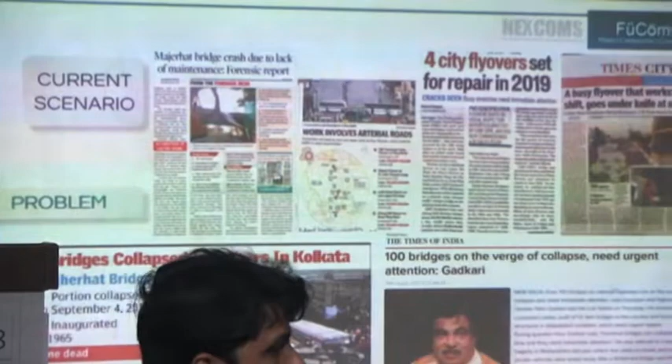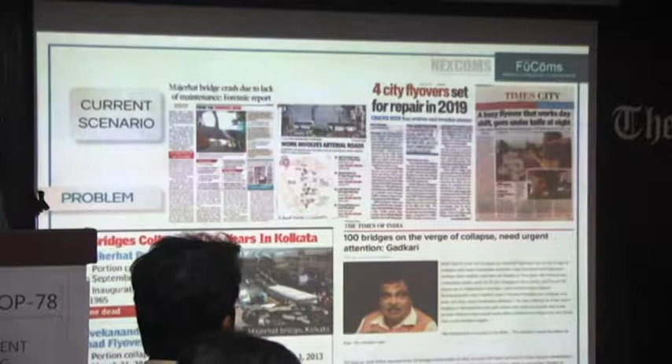We see the current scenario in India, the need to reinforce and bring back life to structural bridges, and current events of India. Next page, please. We've seen enough pictures, so I don't have to elaborate on this. These are current scenarios.

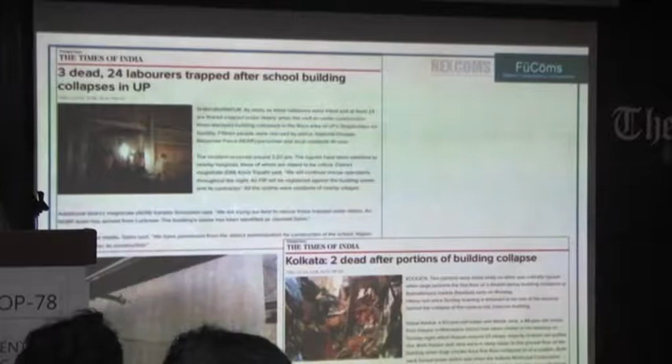Do you wish we could have saved these bridges and buildings and people? Of course, the answer is yes. Would it be nice if the occupants had time to escape, reducing all the casualties or the catastrophic results? Yes.

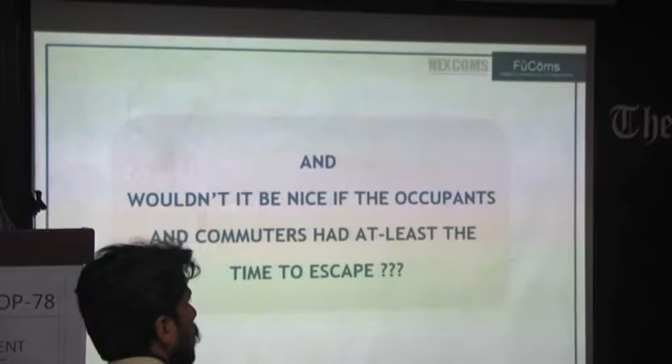What if the strengthening of a building or bridge structure is merely a matter of days instead of months or years? What if we already had that technology here, and we could apply it in India? What if the conventional rehabilitation method that took almost 12 months to strengthen bridges and buildings is replaced by a method which can be done in less than 30 days?

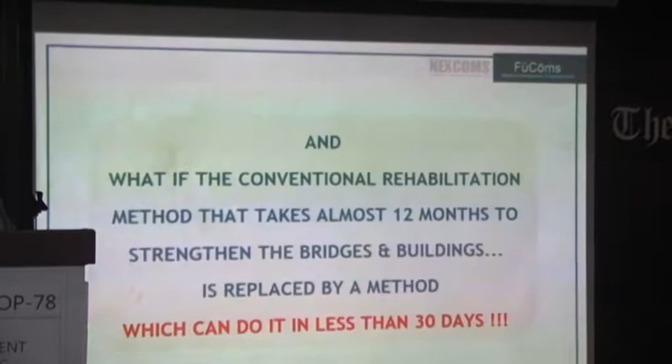We'll have a short film here. This depicts the overview of our product.

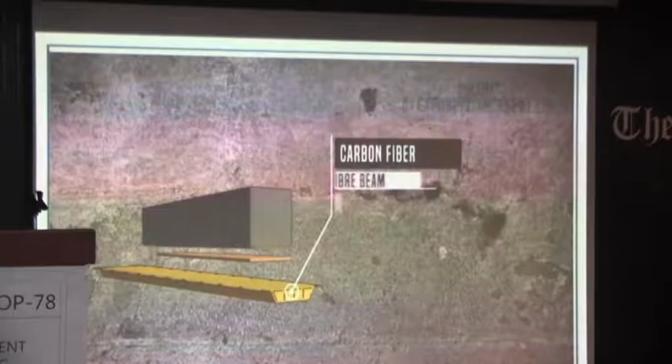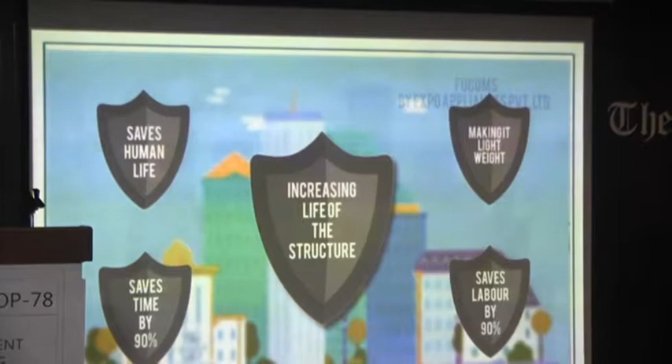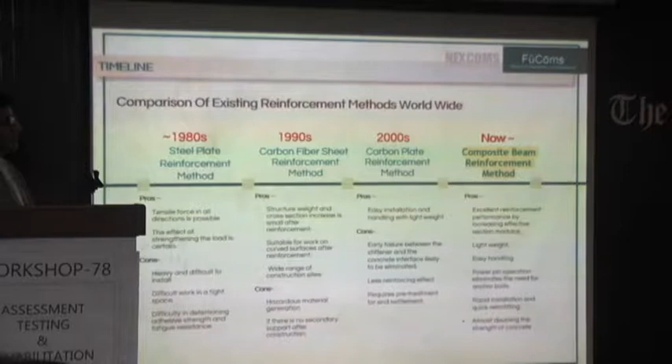Basically we use carbon fiber as well as glass fiber in the reinforcement. The background of this technology evolving is that in the 80s in South Korea, there was a major catastrophe of a bridge connecting the Seoul metropolitan city, connecting two shores, and it collapsed. It was a huge disaster in Korea. Then the government body saw the need to strengthen the public law for these weak bridges. So this constant audit and public law has developed since the 80s in Korea.

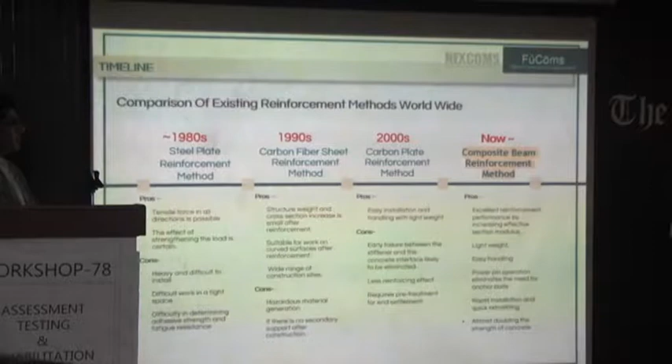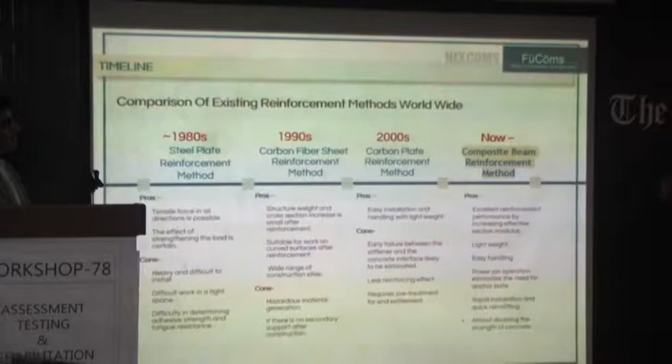We have been studying this, here's a brief view. In the 80s, the steel plate reinforcement method was used. Then carbon fiber sheets were used, and carbon plate reinforcement has been used. Now we use the composite beam reinforcement method.

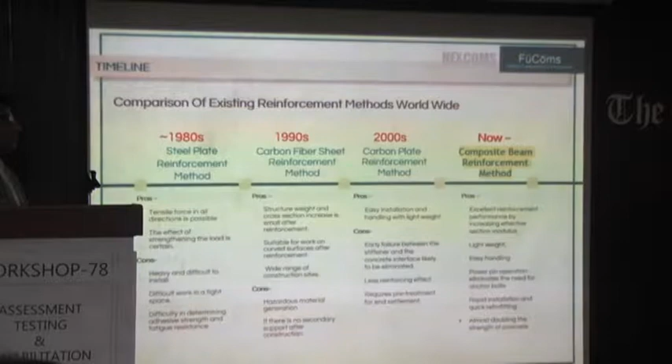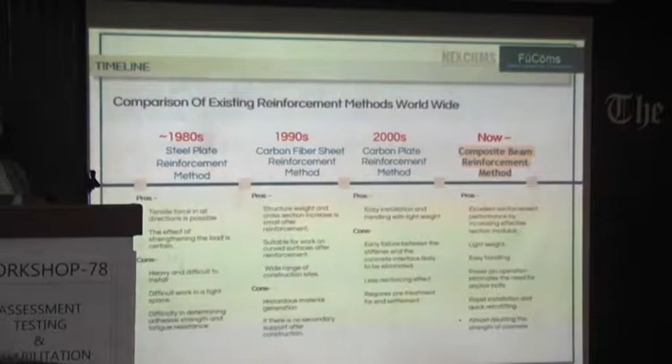Now, the problem with that was when the load peaks to the maximum and the live load changes drastically, it would not show any warning between the concrete and the reinforcement beams or plates. We have studied over a period of time that it defaces from the concrete, and without warning, it will break.

That would not be fair for the government, policymakers, or the actual users of the facility. So we do need a warning for the safety of human lives. Because at the end of the day, why do we build this structure? For human beings, for facilitation and effective economic movements.

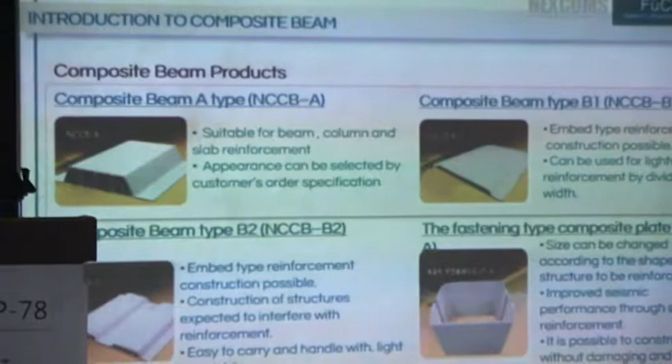So we have used the GFRP technology. These are four of our products. We have beams, reinforcement beams, and what it does, we also have the column wrap. We basically embrace the column on the top and the bottom. Okay, I'll go one by one.

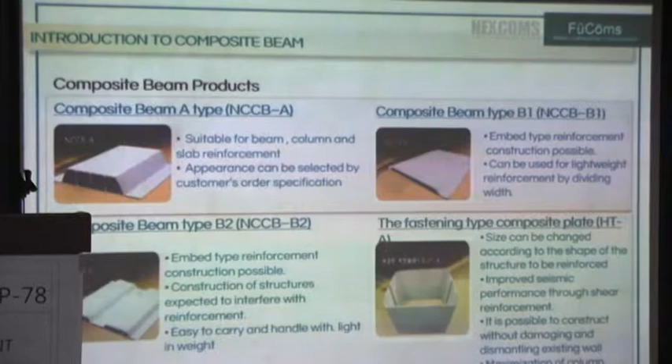The reason is we have made this into a 350 megapascal tensile strength. So one thing it will never do is deface from the concrete. When the peak load is applied, it will sag along with the concrete, giving a fair warning to everyone to accept that warning, evacuate, and take the rightful measures to reinforce the structure.

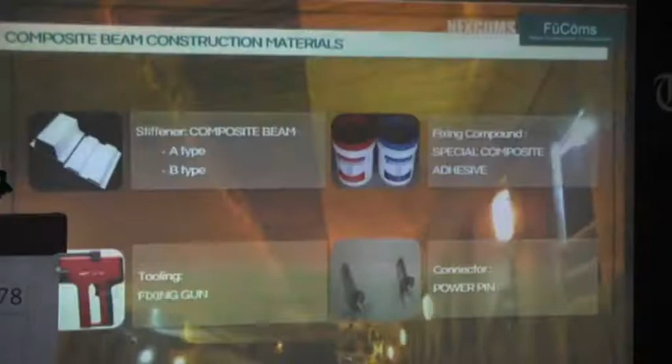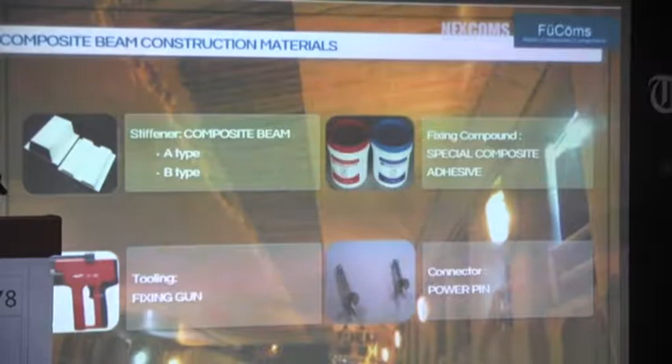These are the four elements, four materials for the concrete, for the installation of our composite beam. The USP of our composite beam, as I told you, is that it becomes one entity with the concrete. That's number one for the safety issue. Number two, fast and easy installation.

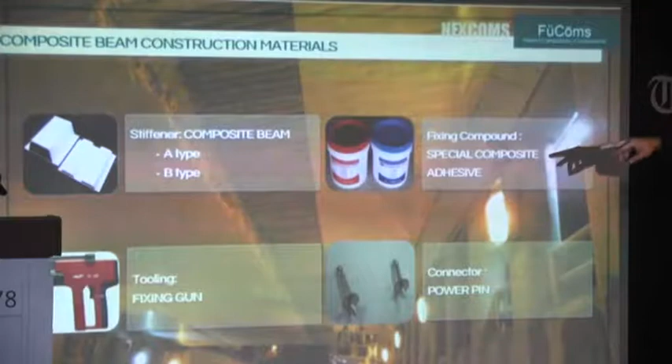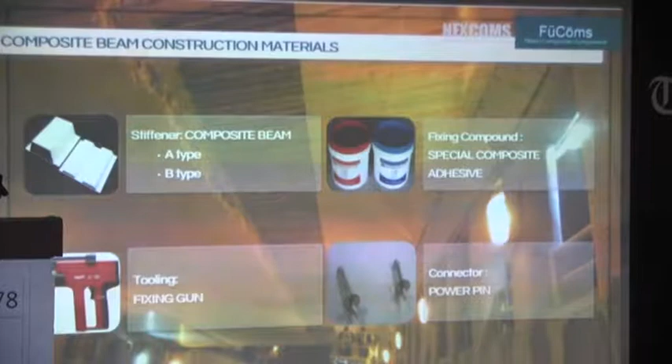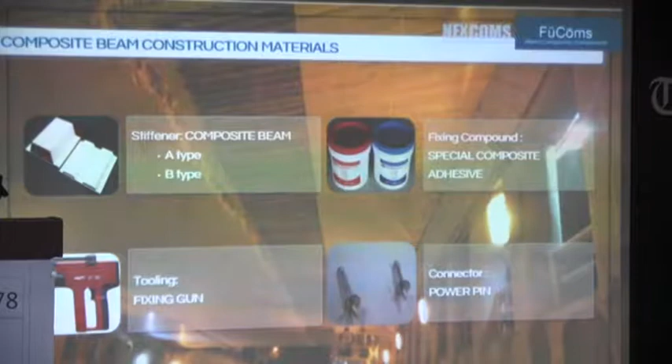We have the composite beams with epoxy, very high strength, we don't have details on this. And then we use the nail gun, not for anchoring, we do not need any anchoring system, we just use it for curing. It'll take maybe around 24 to 48 hours to cure, but our installation is done, we're out the door.

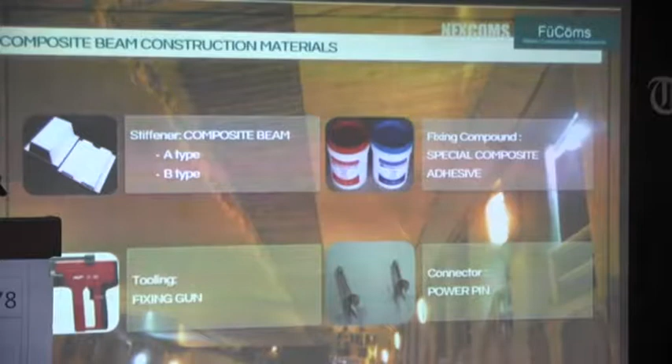I'll give you an example. In the underground metro tunnel, when we see pillars or columns that need to be reinforced, our men, within the 4-hour window of metro operation, did not disrupt the running of the metro. We go in, install, and come out.

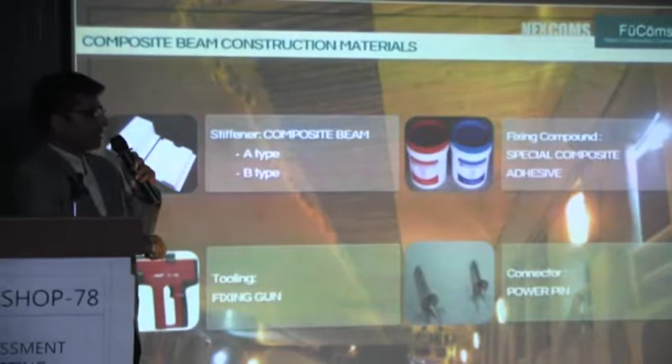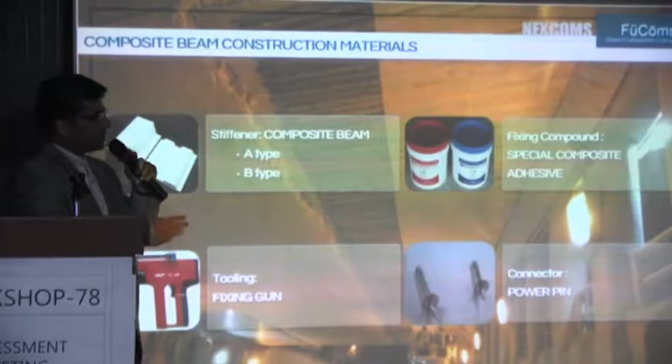The way to fix it is just clean the surface of the concrete, use the epoxy to paste the beam to the concrete, use a power pin to hold it in place till the epoxy is cured, which takes 24 to 48 hours max, and you're done. It just takes care of the whole thing at that time.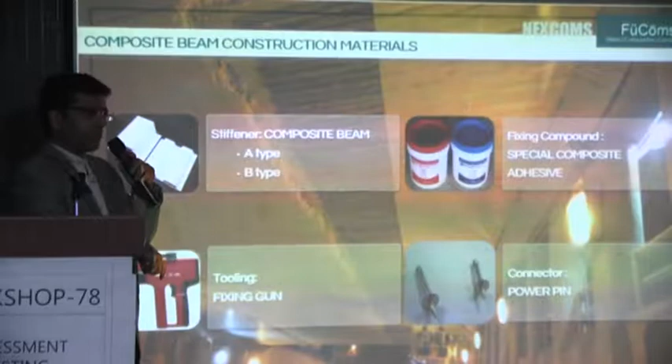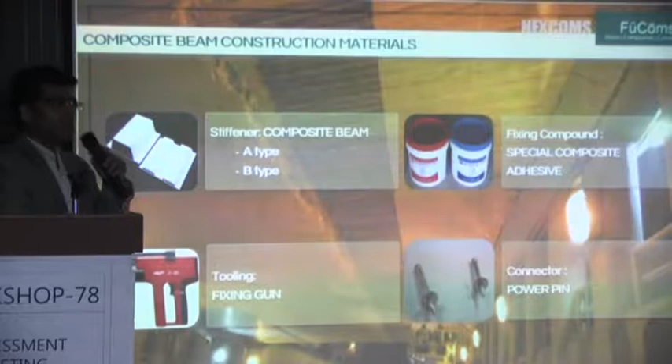It's so lightweight that two people can carry a beam. The example he was giving of the Korean metro, they are the only company certified by the government of Korea to walk into the metro and repair it, because their operation times are so large that they just get a 4-hour window to go in, clean the surface, paste it, gun it up, and move out. That's the only product allowed to be used there.

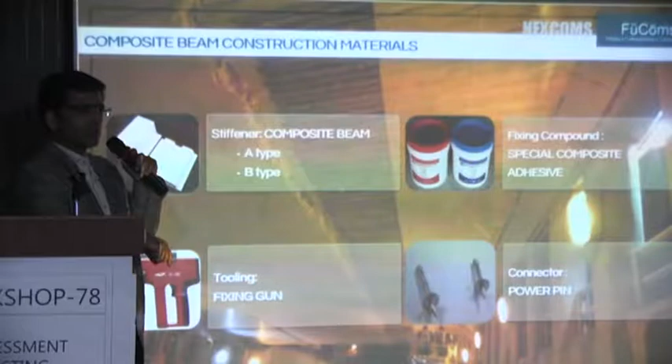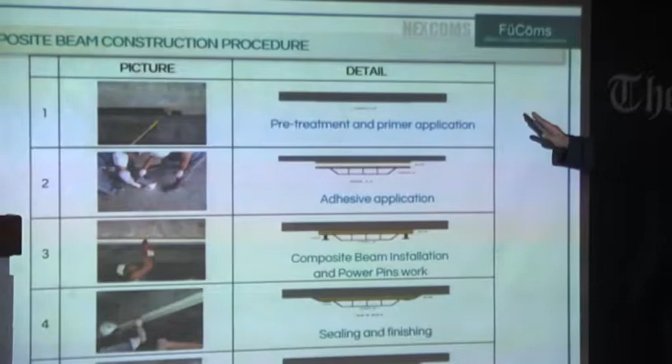As he told, these are the steps for how we install our composite beams. These are the different ways we can reinforce slabs as well as beams of any sort. Of course, bridges are another area we work in, also high-rise buildings or any structures, even masonry bridges, which can be calculated case by case and then reinforced.

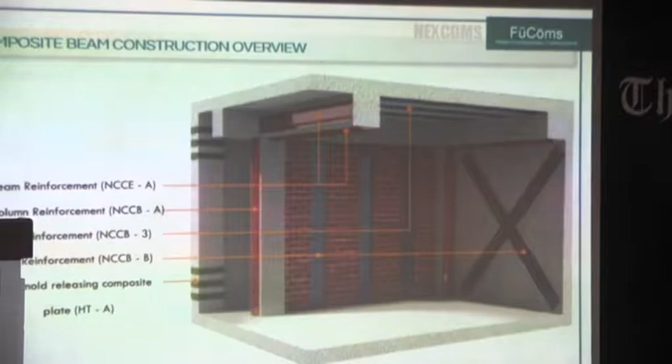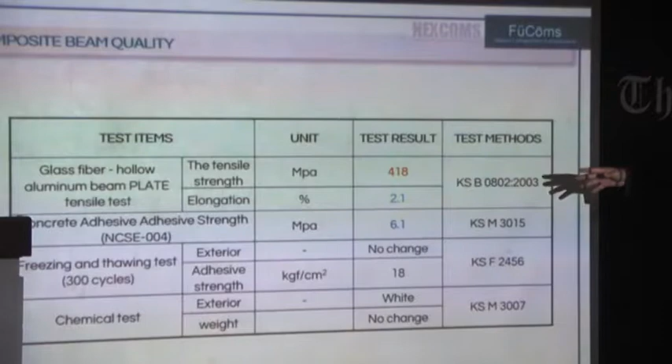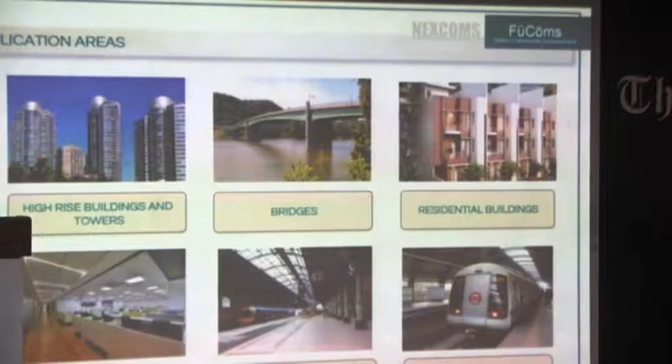These are different things, and then you have the data. I told you near about 418 megapascal tensile strength, and these are some tests done. The application area includes high-rise buildings, bridges, residential buildings, corporate and commercial structures, and different things. These are some of the works that has been done with our beams.

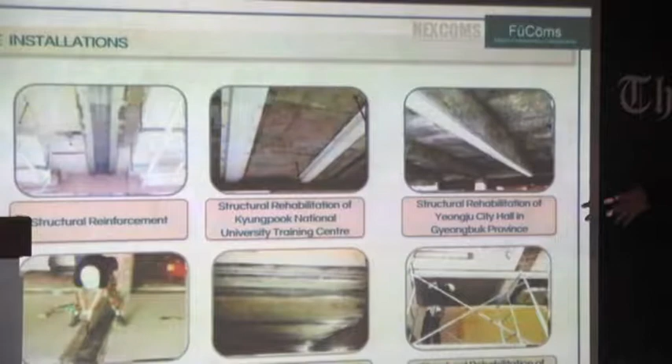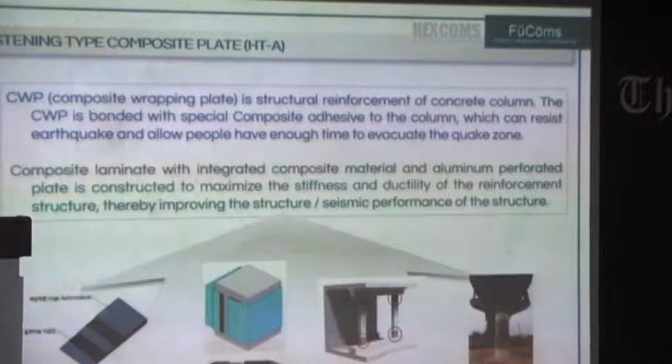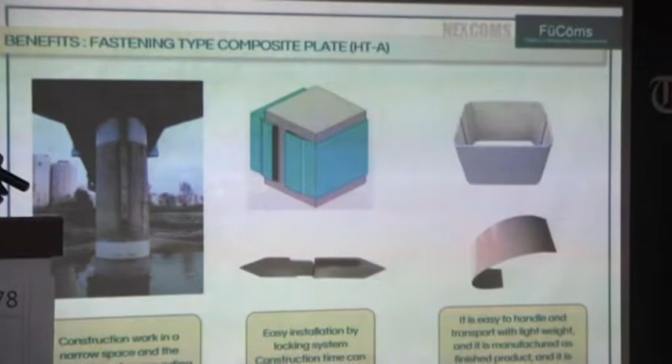So basically we embrace the top and the bottom. And these are also GFRP plates, a GFRP wrap, which is used with the epoxy. So anchor and bolt is not really necessary, but we can give the option of anchor and bolt also for the cost effectiveness. Now, where the beam has to be placed on the beams or the slabs, we do not encourage any anchor and bolt, because that has a lot of complicated issues and all the technical machinery is required.

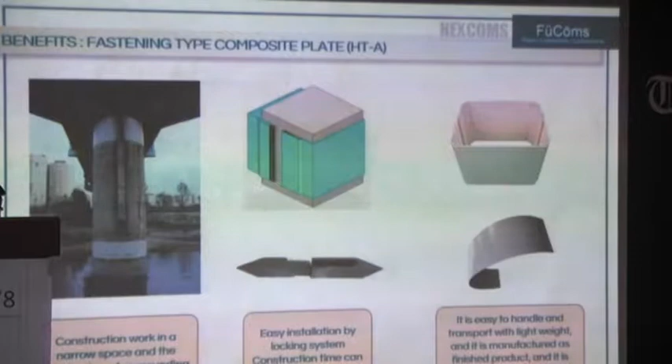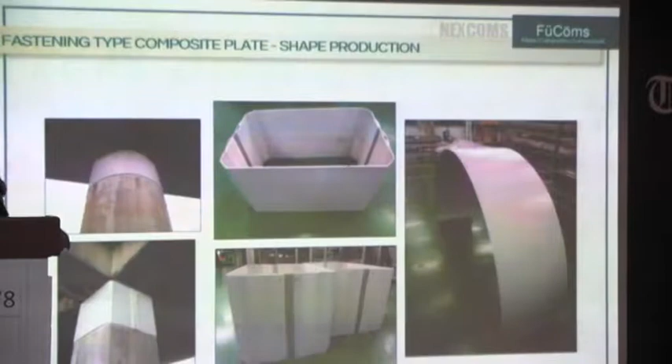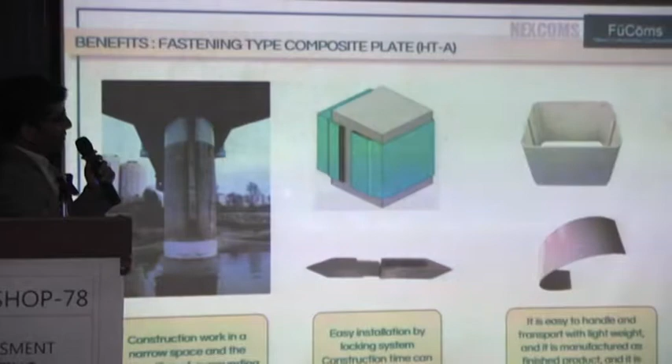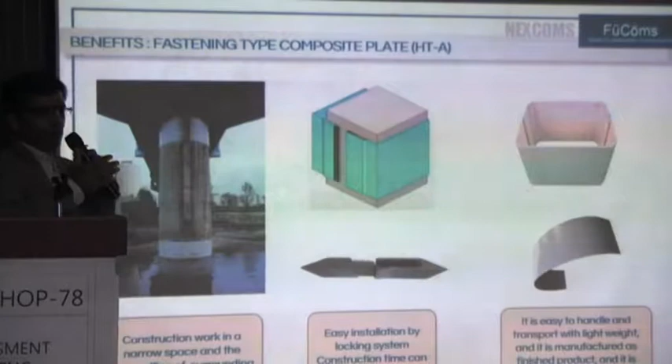So we do offer interlocking plates for fast installation. So if I can just elaborate a little bit, please go back. Yeah, so these are custom made to the shape of the column. Any size, any shape can be customized. And they do not have, like he said, any pinning system to wait for the epoxy to cure. They have an interlocking base system between the two sheets, which you could just lock through. And if there are any gaps, you fill in extra epoxy and seal it off.

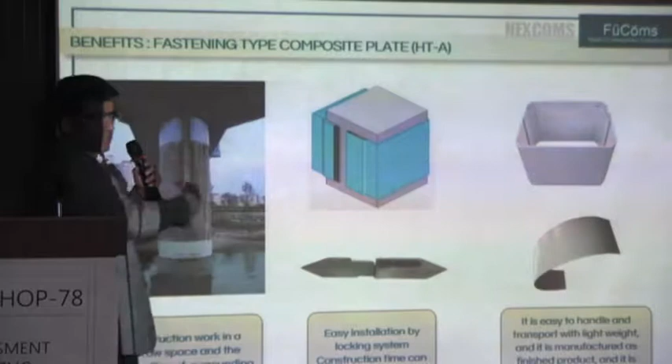So once they lock, they do not open up, because this is like a cross section of the sheet where they lock into each other, and they've got teeth to hold each other and they can't come out. And once the epoxy dries anyway, it's one with the concrete structure. So basically that's a nutshell about our product.

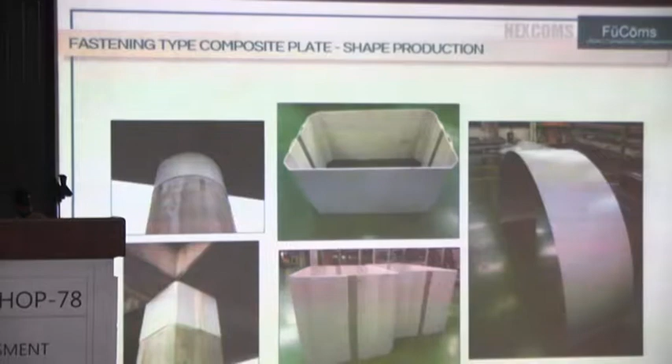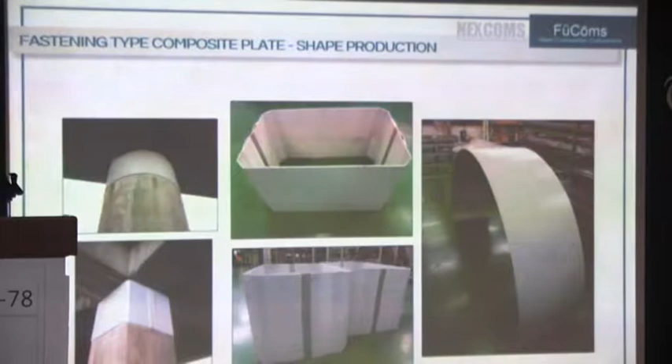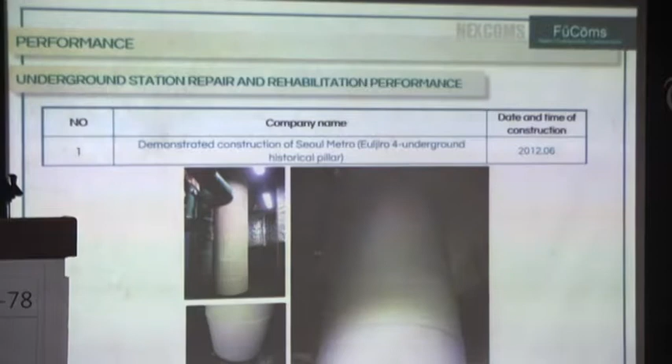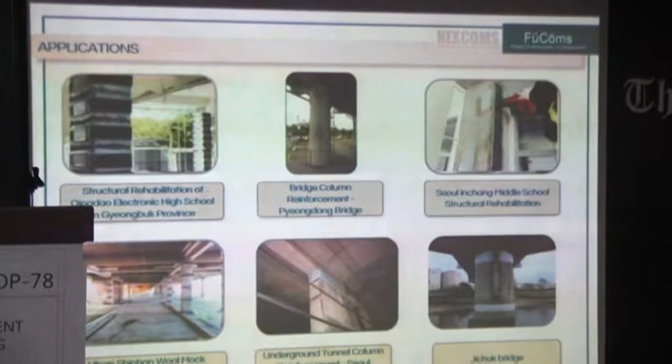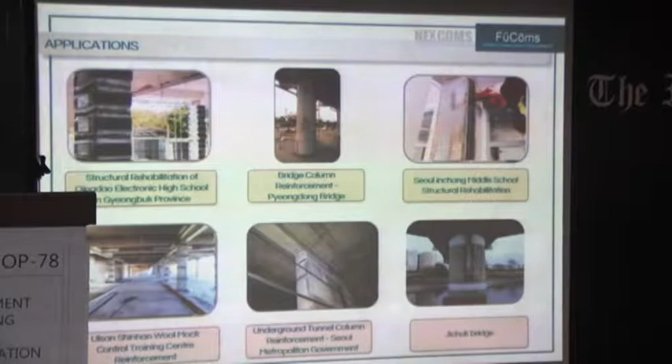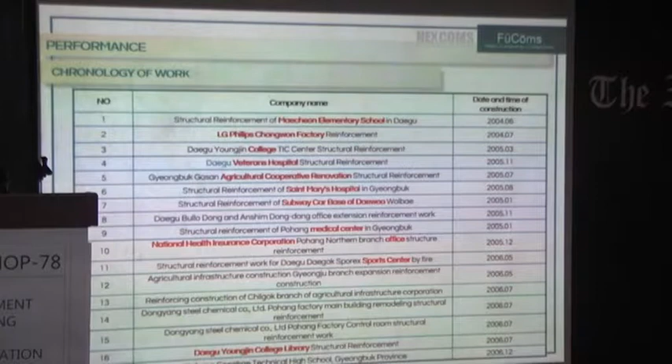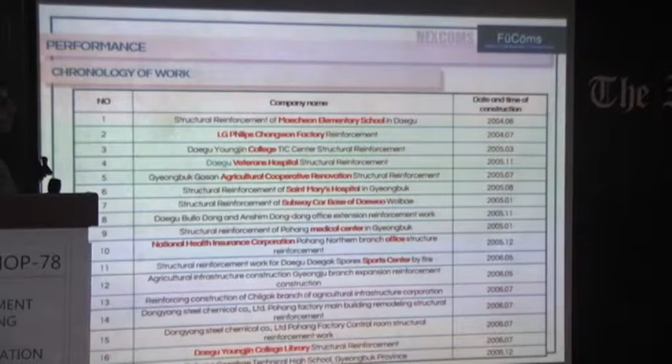So I'm more confident, especially after today's session that I had heard, that it'll have a huge innovative way of applying this to India's problem also. And I think it is an honor for me to actually introduce this product to you. So you can give us an opportunity also to see it. If it works, what have we got to lose?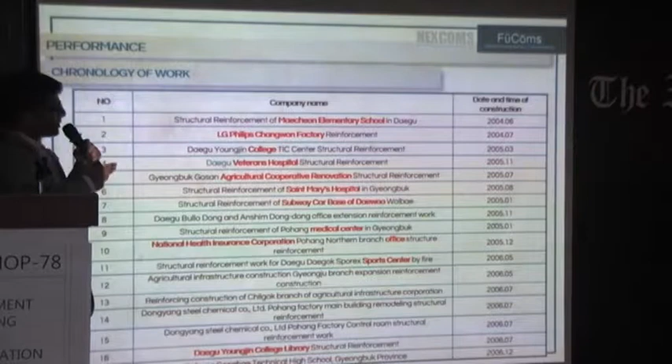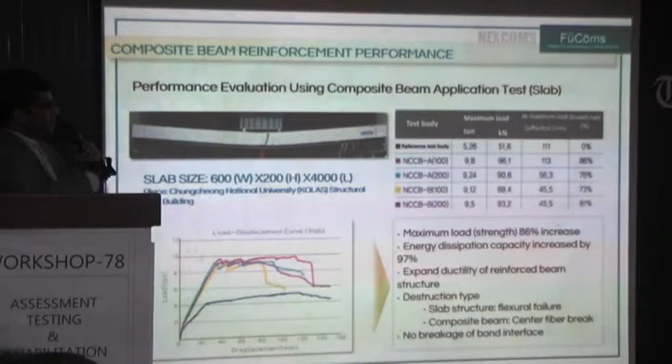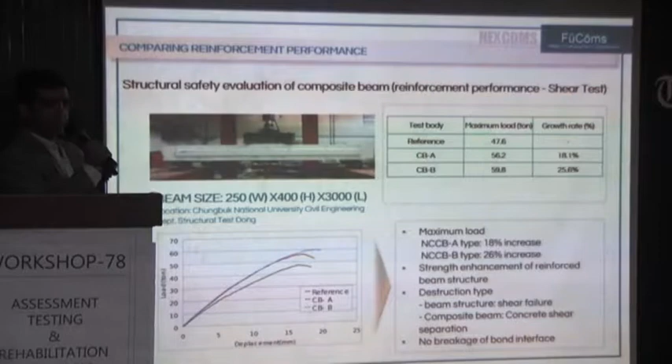Yeah? So since 2004, this is just like a chronology of works that these people have done. Please keep moving. So, okay. Some testings and all, which we could share with you, whoever is interested. We could show you all the test reports and how they've done it and the patents and everything. Fortunately, we are going to start manufacturing this in Noida, and it will be available in the market soon. It's gone for testing to IIT, so we are on the job on that.

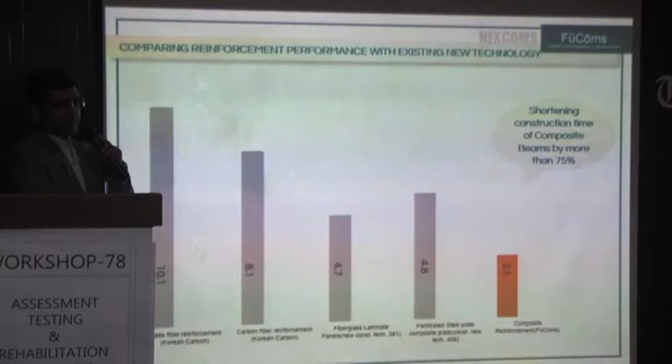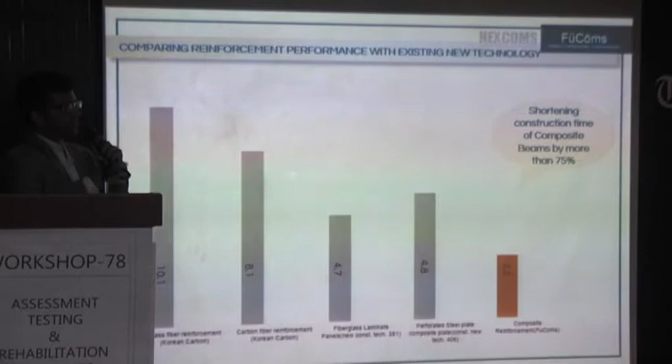And what can I say? We were quite enlightened to see the quantum of concrete bridges that is available in India, which needs a technology like this. So, if I speak in non-engineering layman language, I would say that it almost doubles the strength of concrete once it's fixed. So we did a case study of a bridge where we got the data out and we studied it, we sent it to them, they worked on it.

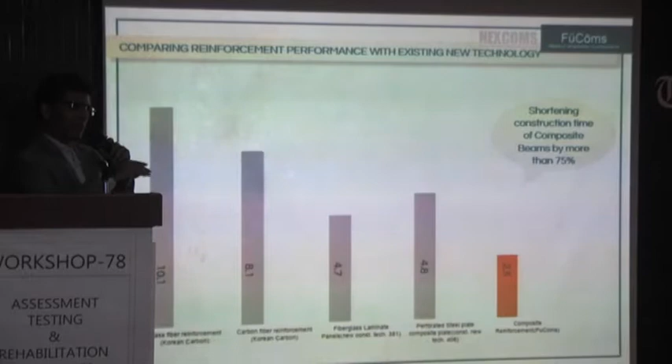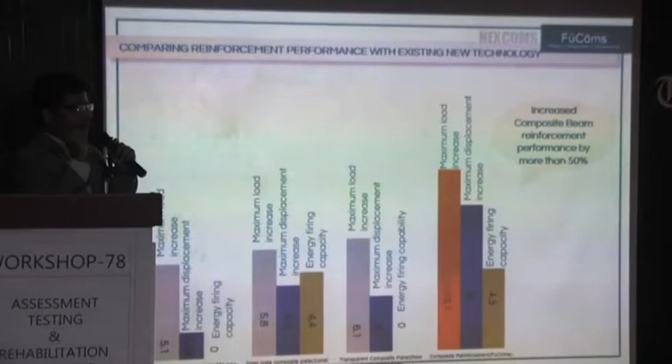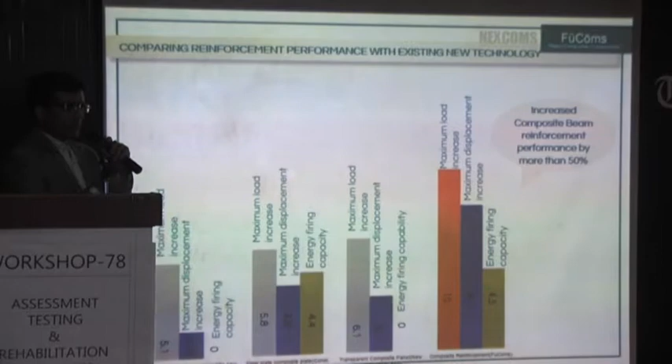And it was supposed to be an M30 concrete bridge. It's somewhere near Gwalior, and I can't share more details. And the testing reports showed that the slab is behaving like M17, M18 concrete. At places it was even M15. So once these beams were applied laterally every 1 meter, the net result was that, so they told me not to give it in writing, but the calculations were coming that the slab was behaving like an M45.

So they said, but don't share this. What you can say is M35 plus, up to M40, because they need to take some factor of safety. But technically, as per the calculations, it was behaving more than M45.